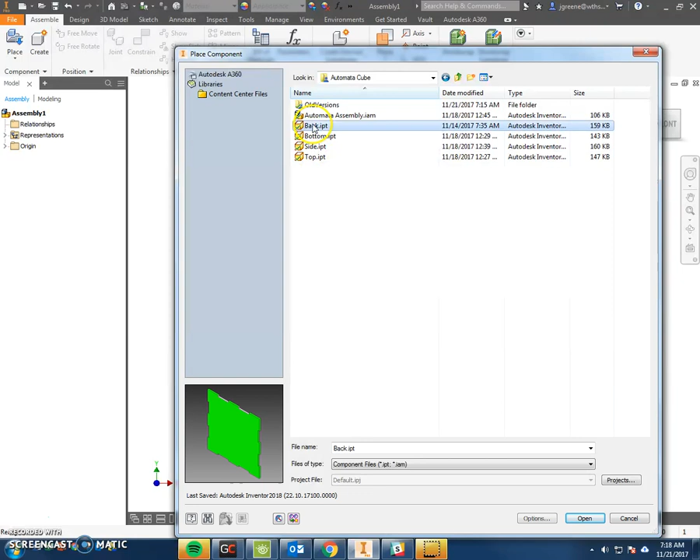And it brings in the correct orientation that I want, so I don't need to right click and change any orientations. But I want to double check that on the left hand side of my model browser that back is grounded, which shows this little icon of a thumbtack. If yours does not show that, before you move or touch this, you want to right click and you want to select Grounded. That will remove all the degrees of freedom inside of this part.

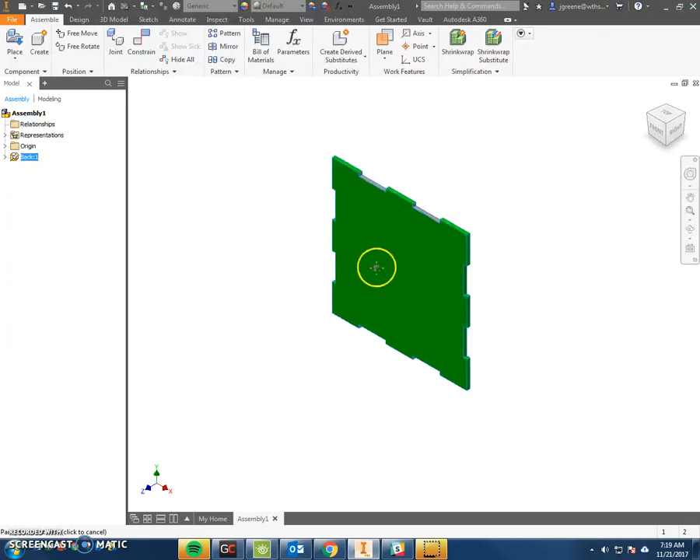So it may look like we can move it around, but if you actually try to click and hold with the left click, you can't move it around. You can only pan around the different areas. So now that I have this, I'm going to go ahead and Place, and I'm going to bring in my side. Open, and right now my side is not in the correct orientation that I want. And so I'm just going to kind of move this around.

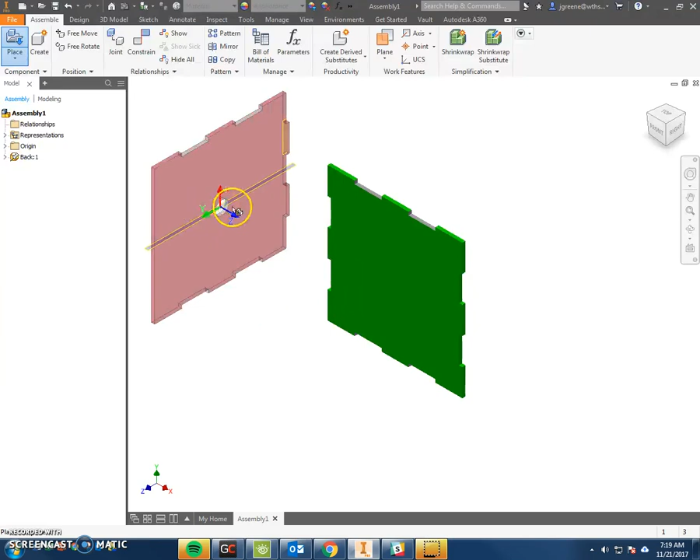Again, your parts are going to be maybe modeled a little bit differently than mine. I know I need to rotate this around the Z, and then I need to rotate this around the X so I get the flat edge in the front. So I'm going to click down, and I know I have two sides, so I'm going to click down over here, right click OK. So now I have my two sides, and you can see I move these two sides, but I can't move the back. So now I'm going to start assembling these where these sides will fit in the little grooves that we've created.

So to do this, I'm going to select Constraint, and in my Constraint box, we've already messed with a bunch of these constraints before. We're mostly going to be focusing on just the regular mate type, and then either using the mate solution or the flush solution. And this is a good indication if you look at the pictures how they work. A mate solution will have two faces opposing each other or touching each other, kind of like this icon. This icon, they're going to be facing the same way.

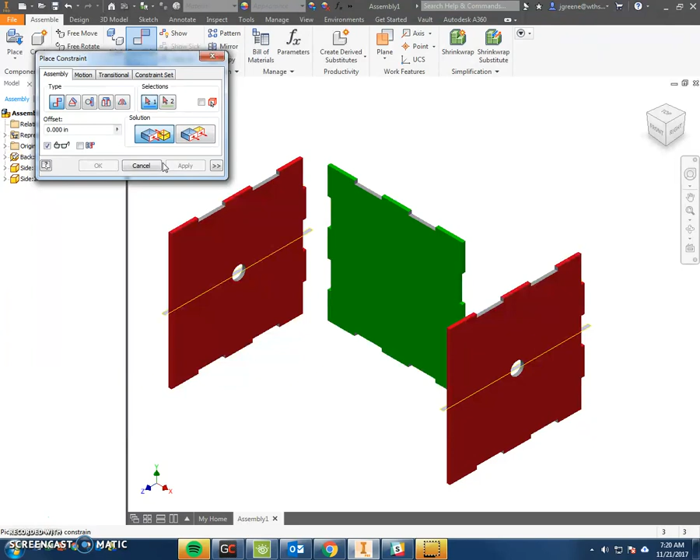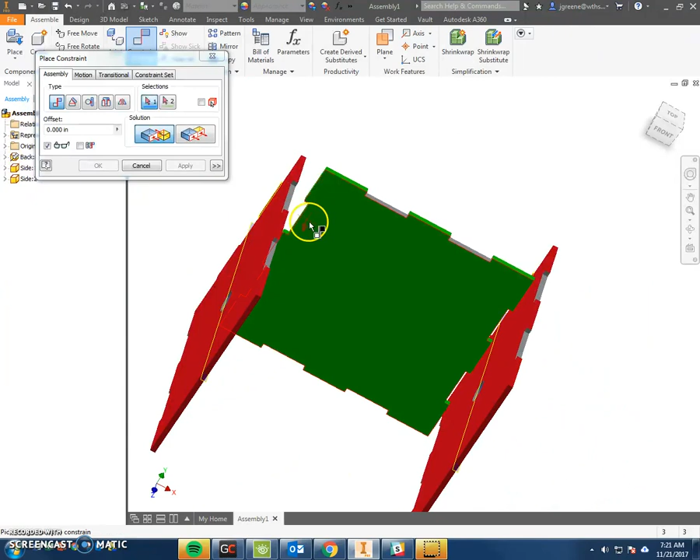So you want to think what faces in these tabs will actually touch each other so we can get rid of movements. Our goal here is to get rid of movement on the Y, on the X, and on the Z. We don't want this to move on any of those. We want it to be stuck in place. So I'll first say, okay, I'm going to constrain. And I know that this part of the tab is going to fit within, if I rotate around, this face. So I'm going to try that first.

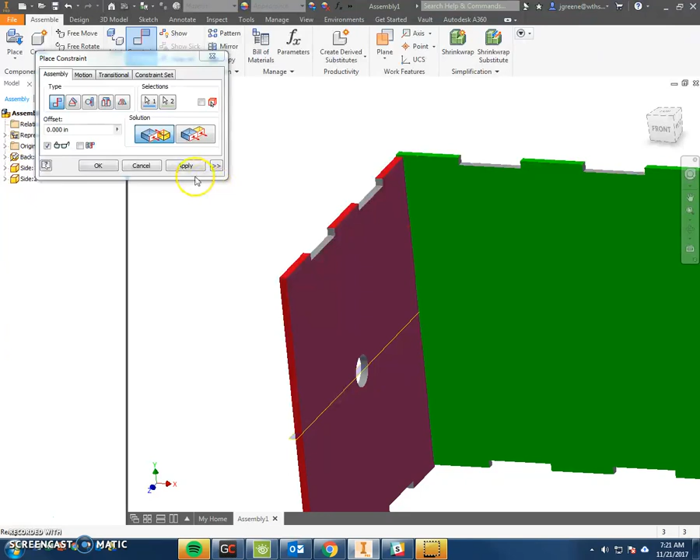So I'm going to click this face, swing it around, and I'm going to click inside this little tab. And you can see there that it places it in the tab. It's not yet perfect. You can see that we're a little off on height, but that's fine. I'm going to go ahead and zoom out and apply and hit cancel, and I'm going to see which dimension I got rid of. So in this case, it looks like I can still move it around completely. That's what it looks like.

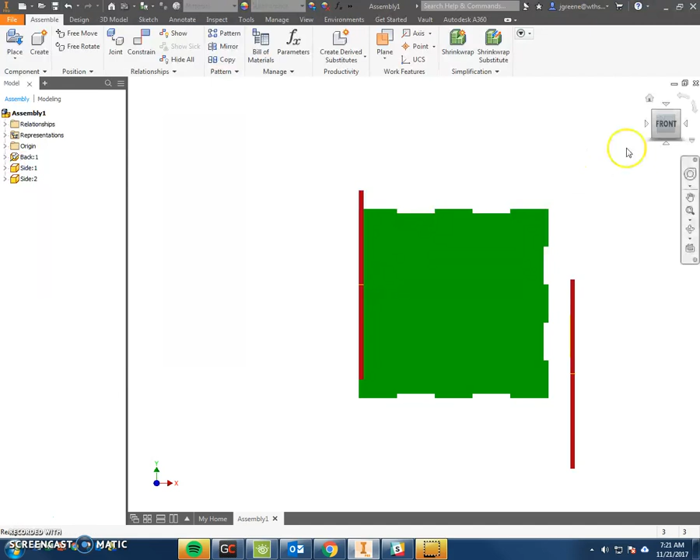But if I go to the front view and I click and I try to move this left and right, I can't because those faces are now touching each other. I can still move it up and down one way, and I can still move it left and right the other way. It's just those two faces are opposing each other at all times. So I kind of move that around. I get an idea of which constraints I got rid of, so I can still move up and down here. So I want to get rid of this movement. Now to do this, I know that I want the top of this part and the top of this part to be flush with each other.

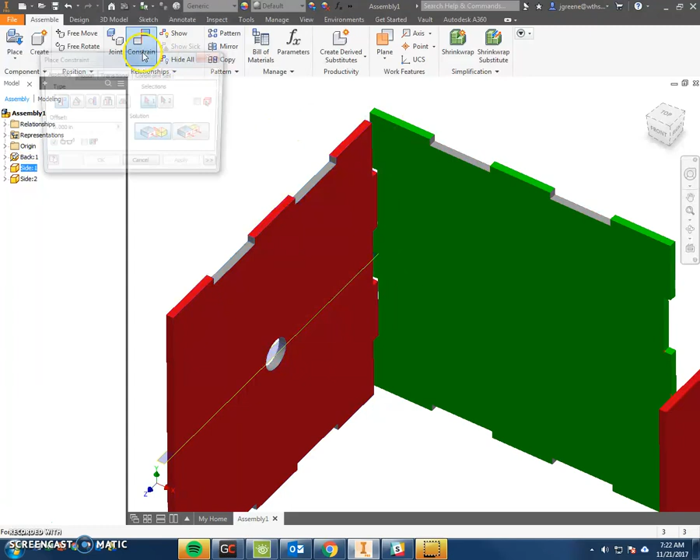So I'm going to select Constraint Flush, and I'm going to select this top and this top. And you can see it kind of moves them. They're not touching, and that's fine. But I'm going to hit Apply, Cancel, and I'm going to go to my front face. I can't move it left or right. I can't move it up and down.

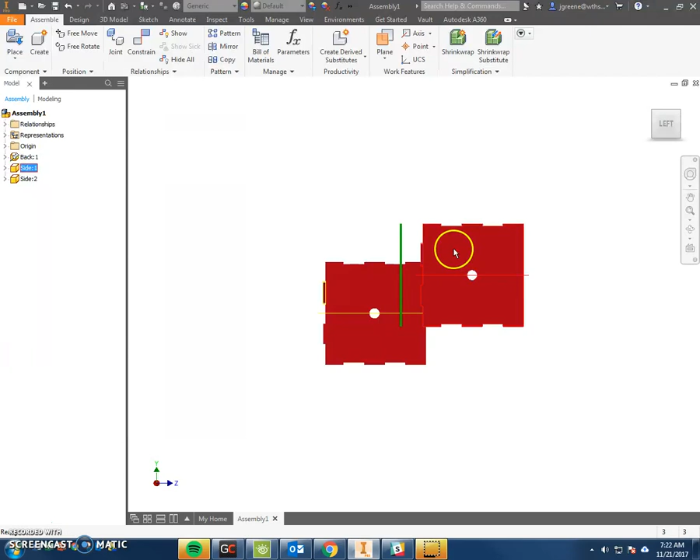But if I go to the left side of my cube, you can see I can still move it this way. So there are a few different ways to fix this constraint here. I can say, okay, this back portion of the tab is flush with the back here. That's one way. Another way is I could say this face right here is mated with this face. So there are quite a few different ways to actually complete a lot of these.

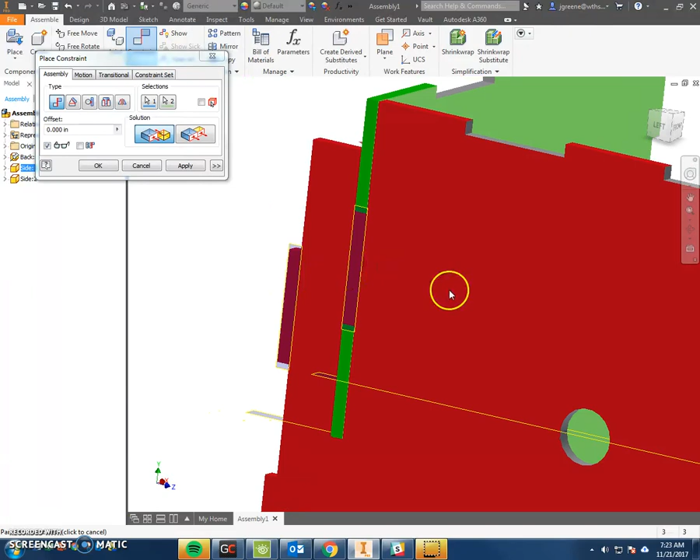So I've done that. I'm going to hit apply, cancel. I'm going to grab my part and I'm going to try to move it around. You can see it doesn't move around, so this one is fully constrained in place. I've removed all degrees of freedom. And there are a lot of different solutions.

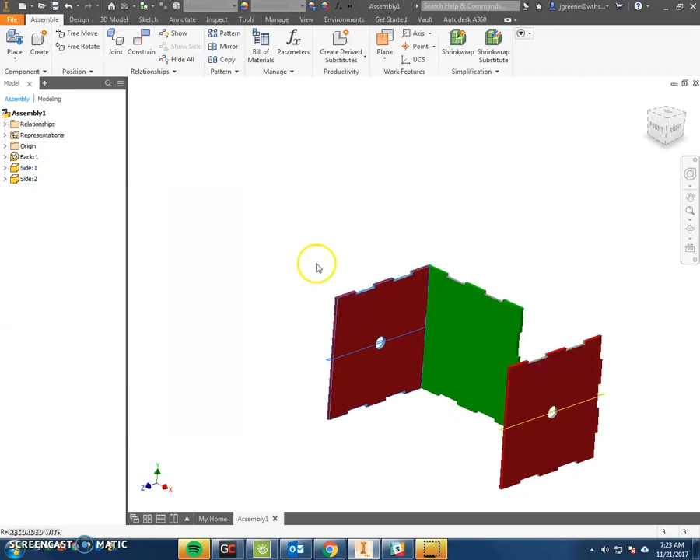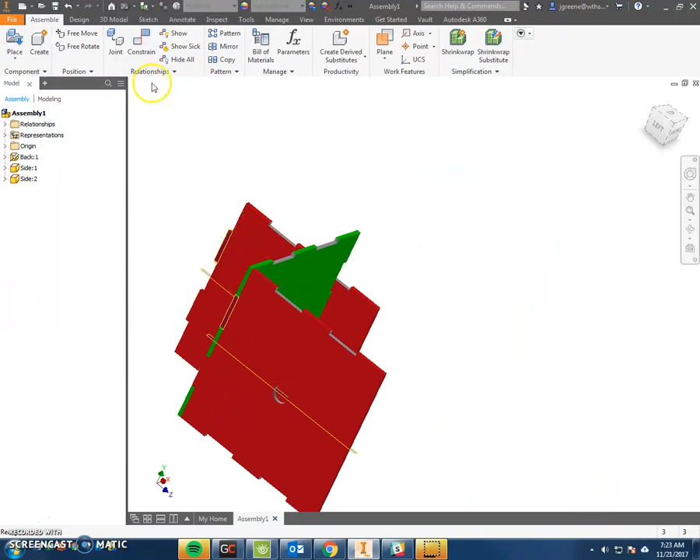Okay? If you ever find yourself where you screwed up a solution and something was working and then it didn't, let's see here if I can try something. If I select, say, this bottom and I want this to mate with this top and I apply, you might get "this assembly cannot be solved." If you accidentally accept this relationship, then you're going to have something called a sick constraint, or a constraint that just doesn't work. You won't really be able to constrain everything else because this sick constraint shows.

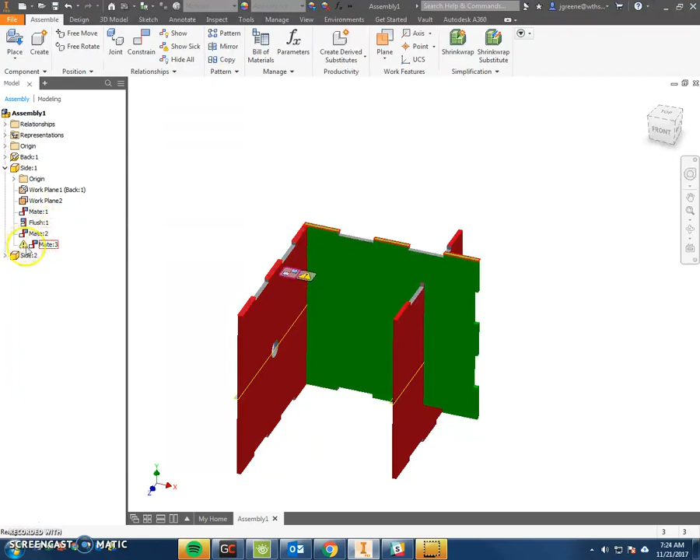So if I click show sick, if this is ever up, this shows the constraint and which one is not set up to work. Another way to see this is you can go into these little arrows. So for example, this is side 1. If I click this little arrow, you can see the constraints I've made, and you can see one that's not working. It has this little yellow triangle. It's an inconsistent mate. Well, I can right click and delete that, and I can try something else. Or maybe one of my other constraints is causing that other constraint you do want not to work. So again, utilize that, edit those constraints, delete those constraints so you can figure out which ones work.

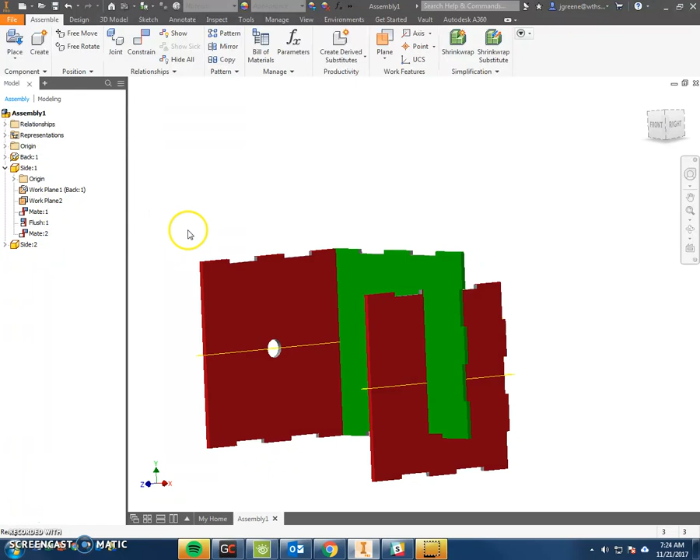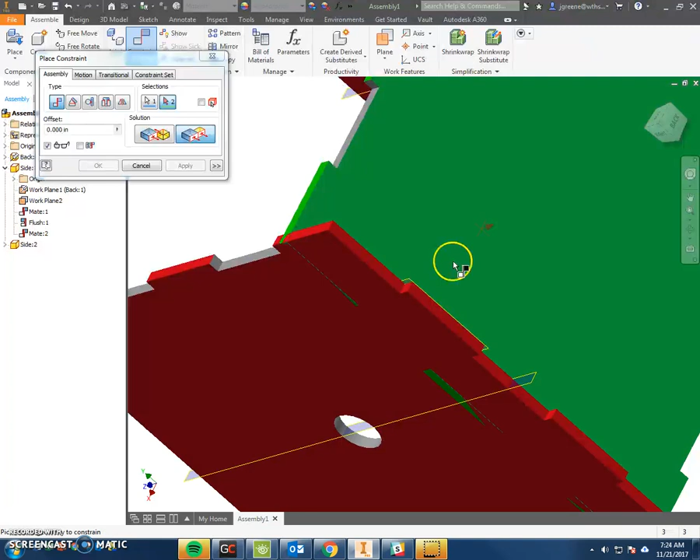Alright, I'm going to go ahead and constrain this side to it. I'll move a little bit faster because I kind of get an idea of what I'm doing. So I know this face is going to be flush with this face, just another way to go about it. Apply. This face and this face will be flush. Apply. And this back face and this part will be flush. So just for that one, I used 3 different flushes, the same constraint. This one I used mates, this one I used flushes.

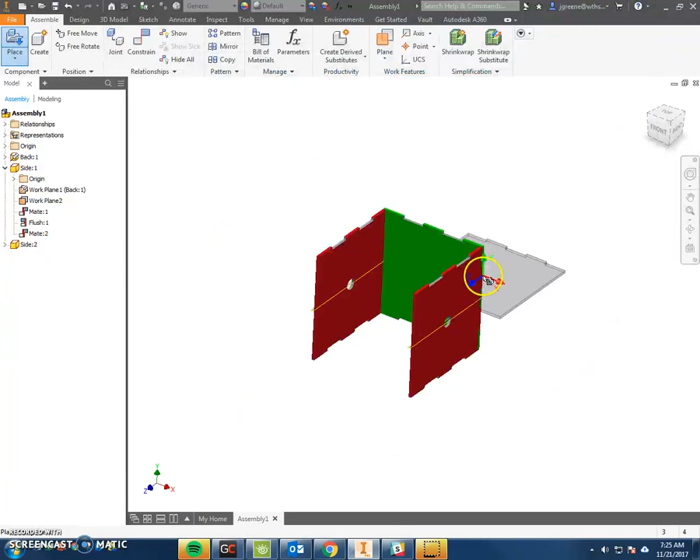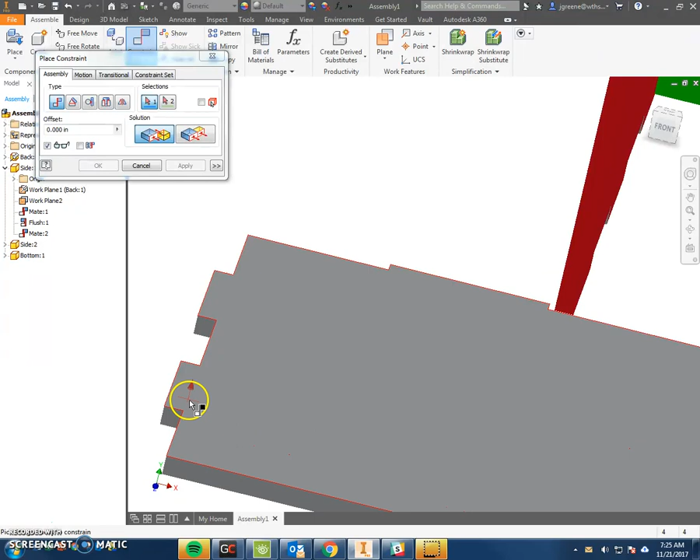Next, I'm going to bring in my bottom, open. Here's my bottom. I want that flat side to be in the front, so I need to rotate around the Y a few times. And pretty much right there is where I want it. So click, right click, OK. And now I'm going to start putting this one in place. So I'm going to try to do mates for this entire one. So I know this face is going to mate with this inside face. Apply. I know this face will mate with that inside tab face right here.

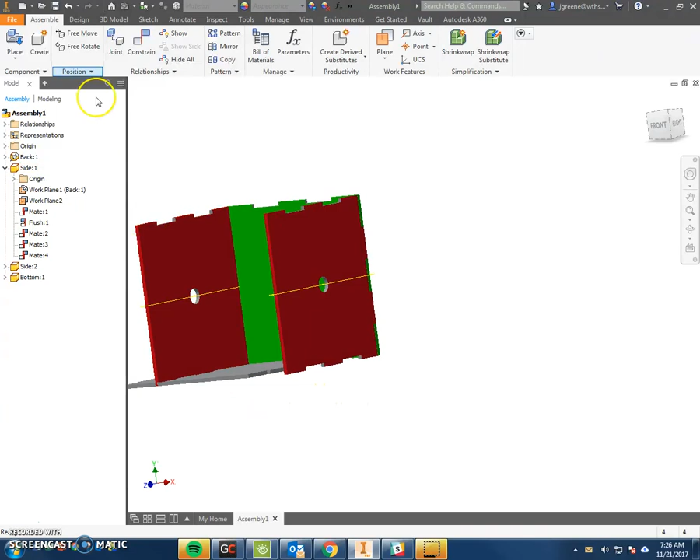Apply. And then what kind of movement do I have left? Okay, so I have this left and right movement left. So I'm going to mate this face to this face. Apply. Now I shouldn't be able to move that. I can't. Wonderful. Nothing can move. And so for that bottom piece, I just showed you I can do all mates instead of flushes to make it work.

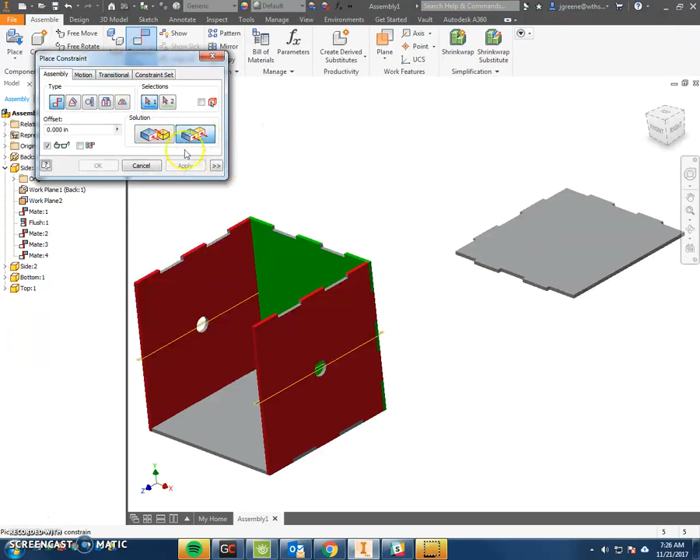So my last piece, I'm going to bring in the top. Okay. Place it down. Right click OK. Oh, look at this. I did not rotate it into place. That's fine. Rotating will help you visualize where things go, but you don't need to have it rotated in place to start constraining it. So for example, I know flush-wise that the front, this flat part, is going to be flush with all these other flat parts. So I can select that, and you can see that it automatically rotated. Sure, it threw it in the middle of the part, but that's fine. It doesn't really do any collision detection.

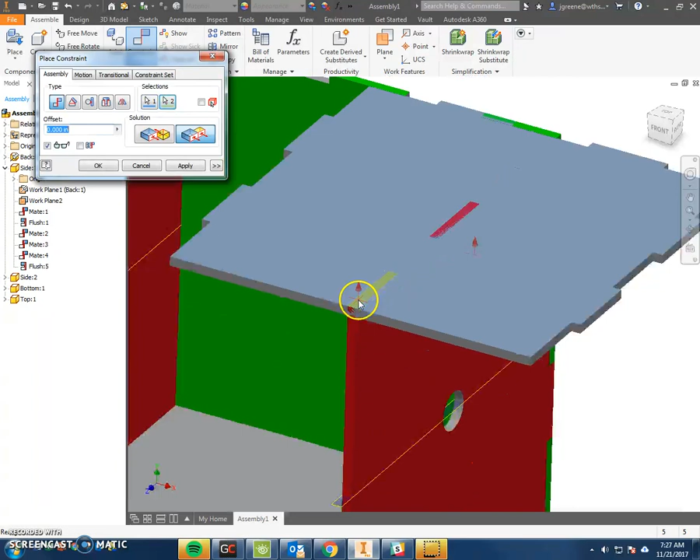So I'm going to select apply, and then I know I want this top to be flush with this top. Apply, and I should just be able to move left and right. So then constrain this side flush to this side, and I'll take a look at it. Apply. It looks good. I can't move anything, and everything looks good.

So there, ladies and gentlemen, is your completed Automata cube for your assembly. Again, you can use many different constraints to make this happen. I showed you mate and flush and how you can use all mates or all flushes or a combination of both to make sure your piece is correctly seated in there.